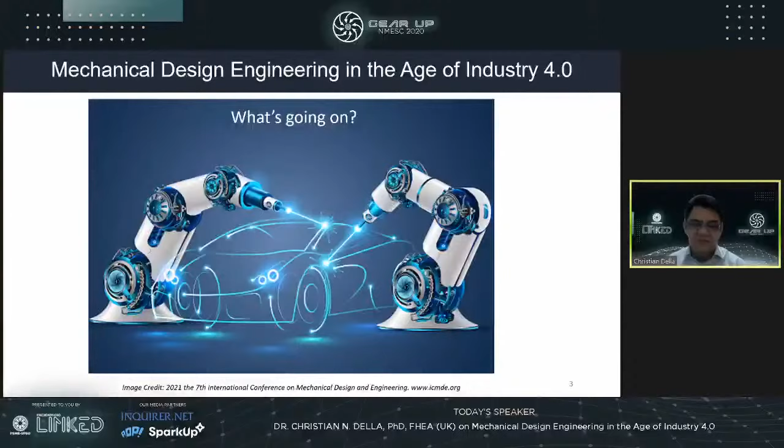So what is Industry 4.0? This talk is about the mechanical engineering or mechanical design engineering application in Industry 4.0. But before that, let's try to define Industry 4.0. Let's try to look at history first.

So the first industry, or Industry 1.0, is basically in the late 1800s. So we have this mechanical manufacturing powered by steam engine, very mechanical. Based on our background, this is what we may call mechanical engineering, because it is really mechanical - all those heavy, huge stuff that was studied during our undergraduate study.

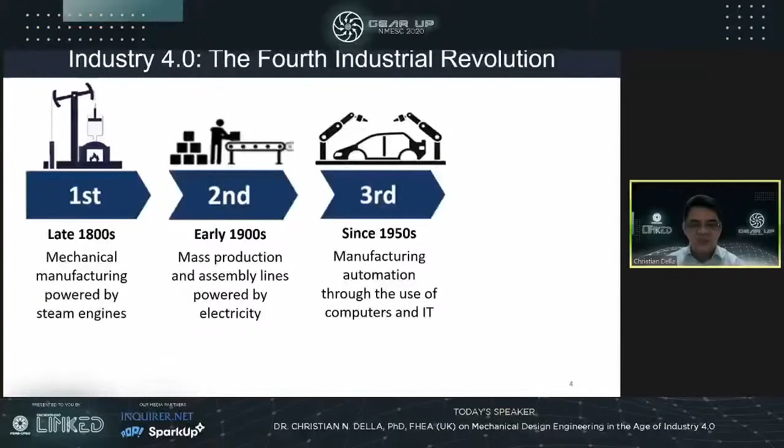The second is, of course, the improvement of the manufacturing through the concept of mass production and assembly lines that's powered by electricity. The third is the manufacturing automation through the use of computers and IT. And the fourth industrial revolution is about intelligent manufacturing, merging of real worlds and virtual worlds. From first to fourth industrial revolution, it's very obvious that we need to develop and improve the manufacturing systems and processes for continuous development.

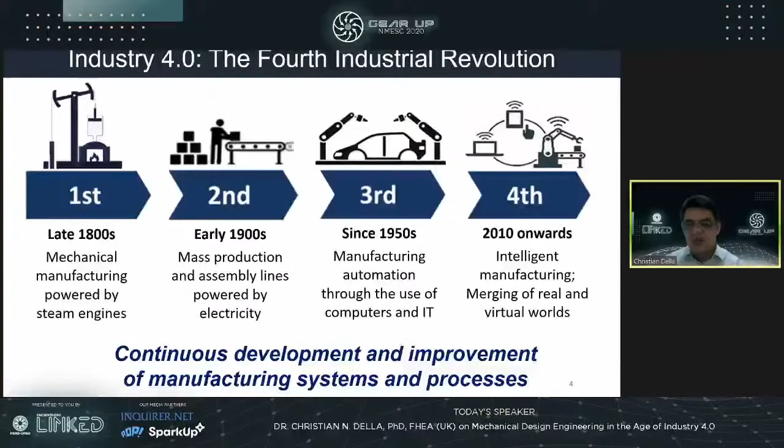Now, are we really at this fourth industrial revolution era? Most Industry 4.0 initiatives are still at the early stage process with a limited scope. We hear a lot of Industry 4.0, but at the moment, they are just initiatives, very limited scope. And pretty much these Industry 4.0 efforts are based on still improving the third or even the second industrial revolution goals, still achieving those third industrial revolution goals and trying to use the current technology to improve those technologies.

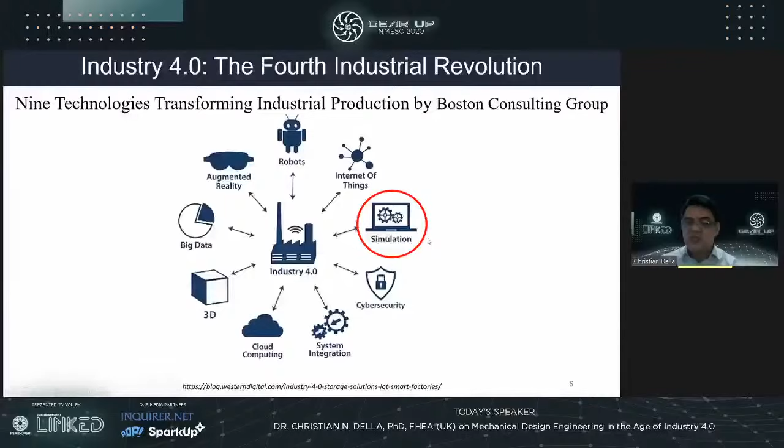The Boston Consulting Group identified 9 technologies transforming industrial production. These are the Internet of Things, robots, augmented reality, big data, 3D modeling, cloud computing, system integration, cybersecurity, and simulation, which will be the focus of my talk.

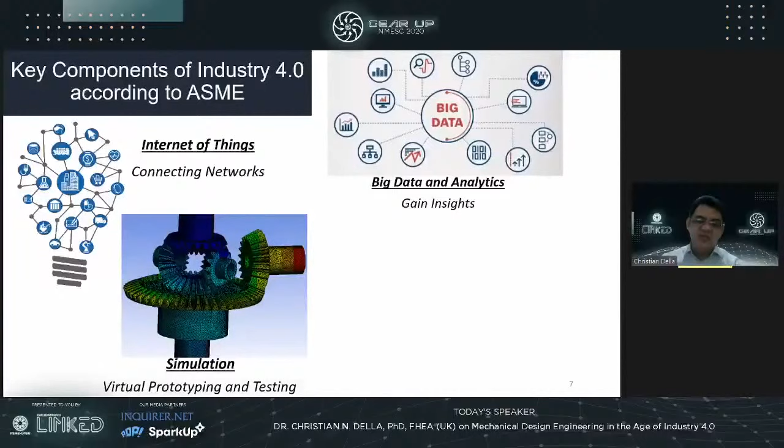What are the key components of Industry 4.0 according to the American Society of Mechanical Engineers? These are the Internet of Things, which connects networks, big data analytics, which provides insights from information out there, simulation, which is about virtual prototyping and testing, and additive manufacturing, which now provides the opportunity to fabricate or manufacture complicated geometries.

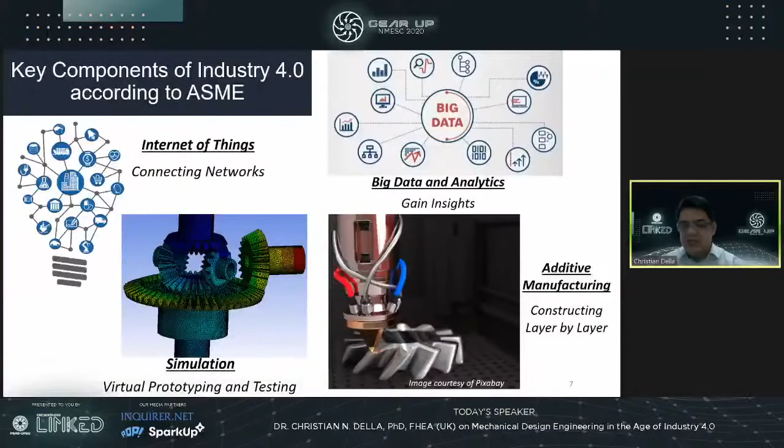When I speak of simulation, I speak of finite element analysis, which deals with solids, and computational fluid dynamics, which, by its name, discusses the movement of fluids, or simply fluid flows.

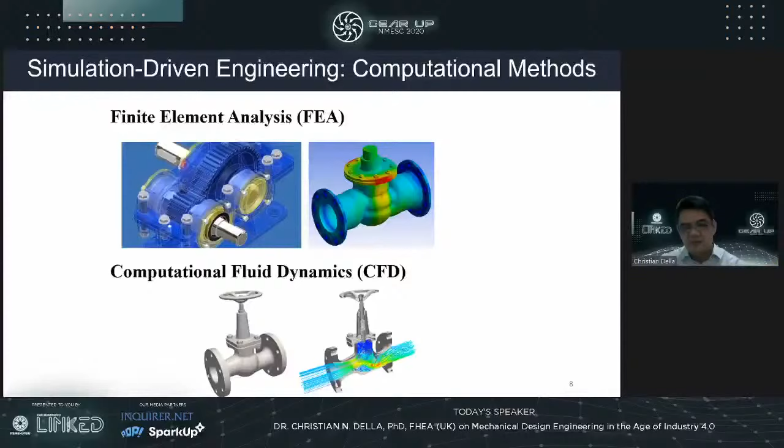So what is the future of mechanical engineering? There was an interview in 2008 at one of the conferences, and one of the students asked the professor, 'What is the future of mechanical engineering?' The answer was: the future of mechanical engineering is not mechanical engineering. So we need to ask ourselves what we define as mechanical engineering today, and what we should be defining it as for the future. Then we can begin to talk about the future of mechanical engineering.

So for this generation, your generation, are we looking at the rise of digital mechanical engineering? What does ASME, the American Society of Mechanical Engineers, describe, or how do they describe digital mechanical engineers, or simply digital engineers?

ASME says that the digital engineer is now expected to carry out simulations in the virtual environment first, before proceeding to the design, build, and test stages. In industry, this approach results in reduced product development cycles.

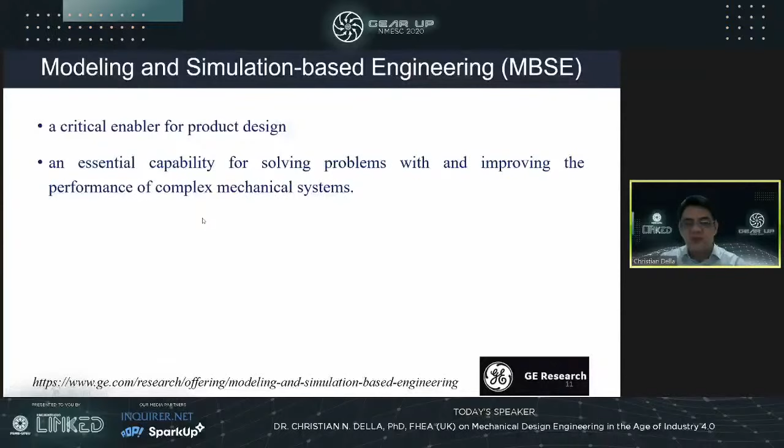To GE, modeling and simulation-based engineering is a critical enabler for product design. It is an essential capability for solving problems with, and improving the performance of, complex mechanical systems. Modeling and simulation-based engineering is used to optimize the design of parts and other equipment, and to understand environmental and situational effects on parts and products that can have significant impact on product performance, efficiency, and quality.

Modeling and simulation-based engineering is critical to reducing product design time, improving part and product performance, and improving the manufacturability and serviceability of assets.

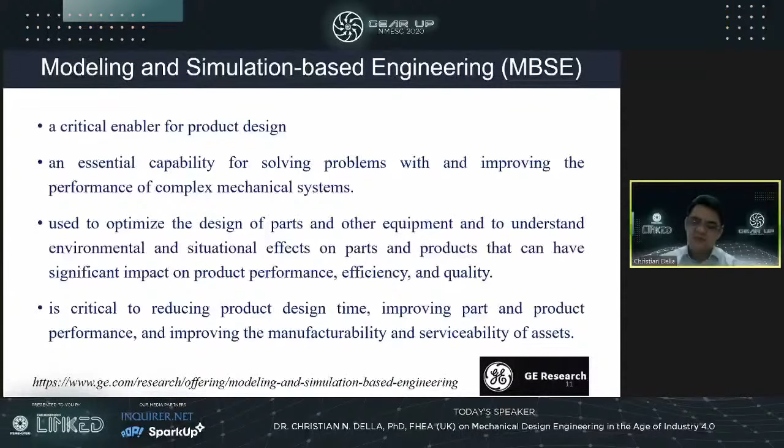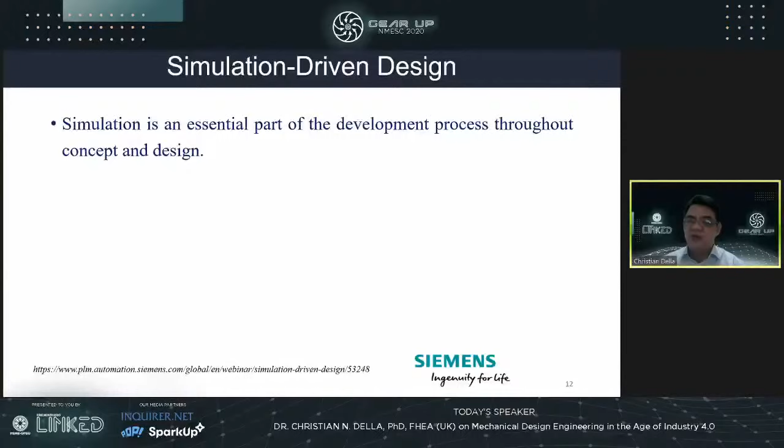What about Siemens? At Siemens, simulation-driven design is an essential part of the development process throughout concept and design. Simulation is leading manufacturers to discover and produce new designs, aided by new manufacturing processes such as additive manufacturing. Simulation helps designers create better, more robust designs earlier in the development process, while also speeding up the overall time it takes to release a design, i.e., faster time to market.

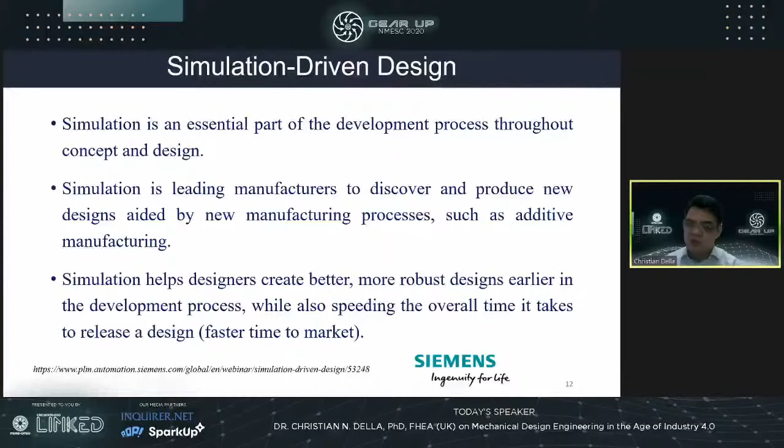But just like mechanical engineering, simulation-based engineering is also evolving. Let's have a look. In the 1960s, simulation was just based on, or being applied for, specific individual applications, such as mechanics.

In 1985, we see the development of simulation tools, which were now able to answer specific design and engineering questions, such as fluid mechanics. In the year 2000, simulation had advanced to be able to analyze the whole system, allowing a systemic approach to multi-level and multidisciplinary systems with an enhanced range of applications.

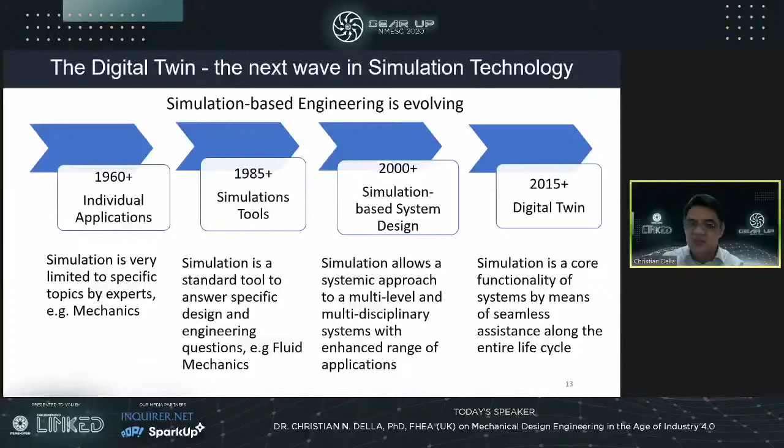So what about the digital twin? The digital twin is now a core functionality of systems, by means of seamless assistance along the entire life cycle. Okay, still not clear to me, so let's try to define what a digital twin is.

Let's start with the physical twin. We know that we have this physical system, and we made a digital twin, a simulation model, out of that physical twin. From the physical twin, we can get performance data, health data, maintenance data, and also the events or loadings that can affect the physical twin.

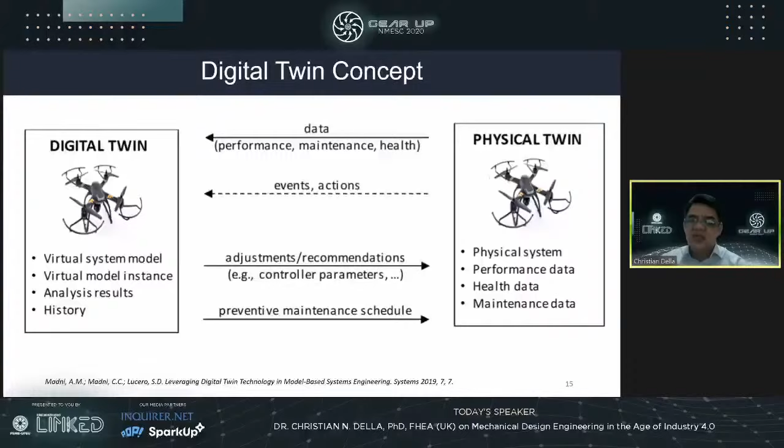This information can be transferred to that digital twin, that virtual system model, where we can analyze the effects of events and actions. We can trace the history, and then from there be able to come up with some adjustments or recommendations, as well as preventive maintenance measures to the physical twin. So this is a simple concept of the digital twin.

The digital twin is basically the seamless integration of Industry 4.0 technologies. As we can see, all these technologies are available. The current problem is trying to integrate them so that we will be able to increase production, as well as increase the life of our engineering structures.

There was a report in Europe that the digital twin market is expected to grow to over 15 billion by 2023. As mechanical engineers, we probably will be able to contribute in CAD and 3D modeling as well as simulation. Depending on your major later, you probably will be able to touch some of the other specialties as a data analyst or maybe robotics engineers and so on.

Moving forward, there are now many digital twin concepts that have been presented in the literature. We see them applied, or see the potential application, in manufacturing, automotive industries, offshore, aerospace, and of course wind energy.

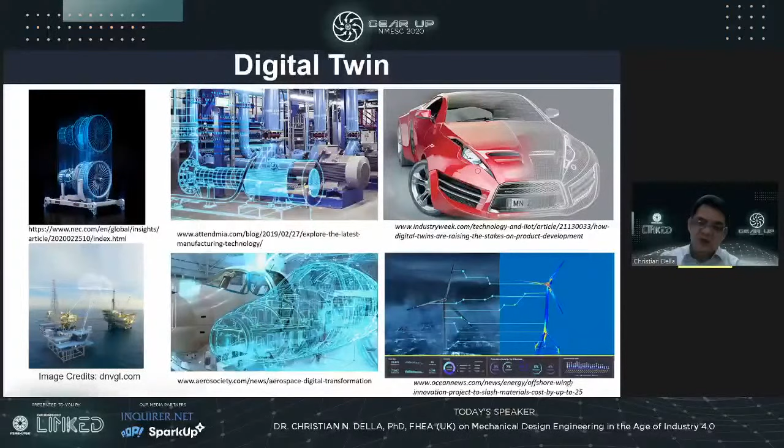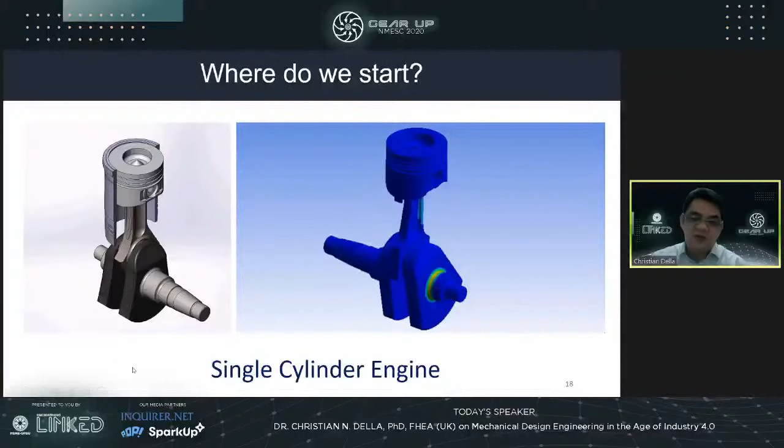One of them is, of course, learning the finite element analysis. In this case, this is just a simple static analysis where we study the stress distributions within our piston, connecting rod, and crankshaft, or basically just a single cylinder engine.

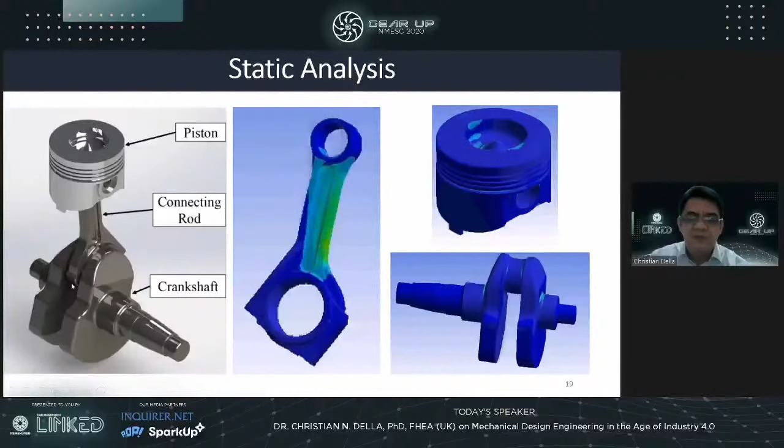Moving forward, we can also improve that model, make it transient, which is what digital twin wants to do. We can apply the loads while it's moving and observe the stresses and deformation within our structure. From there, we will be able to determine whether our structure will be safe or not. That's our job as mechanical engineers.

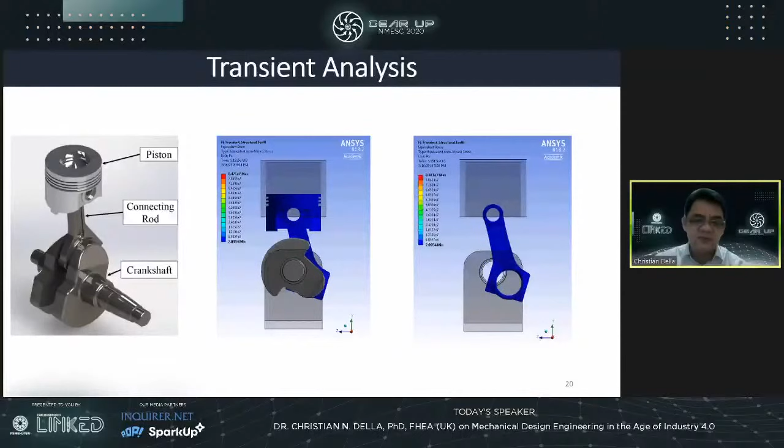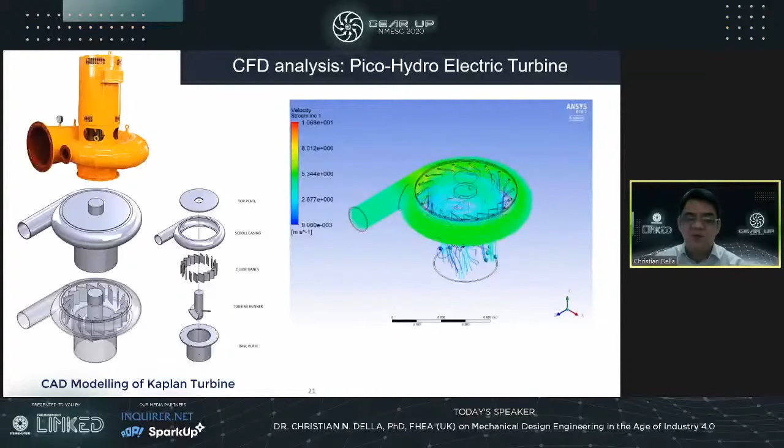So what about if I'm working on fluids? This is a classic example of a CFD analysis, or computational fluid dynamics analysis, on a pico hydroelectric turbine. We are able to simulate the flow of water through our hydroelectric turbine, and from there transfer the information to our finite element model, and be able to determine the stresses and deformations in our propeller. Thereby, we will be able to determine whether our turbine will be safe or not based on the loads that we have.

Now, if we see that there is a very high stress acting on our structure, then we probably can inform the operator to lessen the load that's being applied to our turbine. And that's how this one works. It's just that for digital twin, instead of a human trying to inform the controller, it's now AI trying to inform another AI to control the operation of this turbine.

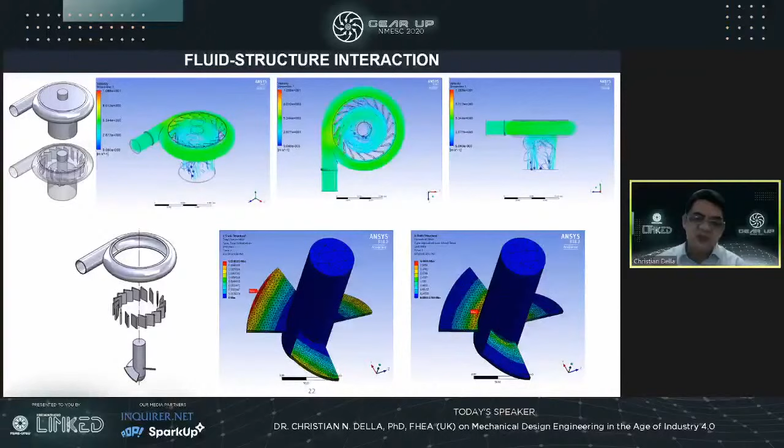So if I want to learn how to develop simulation models and probably become a simulation engineer, what do I need to know? What are the knowledge and skills that I need to develop? We are already mechanical engineers, so we probably would already have a strong background in engineering sciences, looking at mathematics, physics, engineering mechanics, heat transfer, thermodynamics, and so on and so forth.

We should have a strong understanding of the theories of the computational methods. It's not just application of tools. We see nowadays that there are many softwares being used by people who don't really know the physics, mathematics, or science behind these tools. And that's really dangerous, because they might be designing something that's not safe or can cause problems in the future. So it's really important to have at least a good understanding of the computational methods that we have at the moment, what are their strengths and what are their limitations.

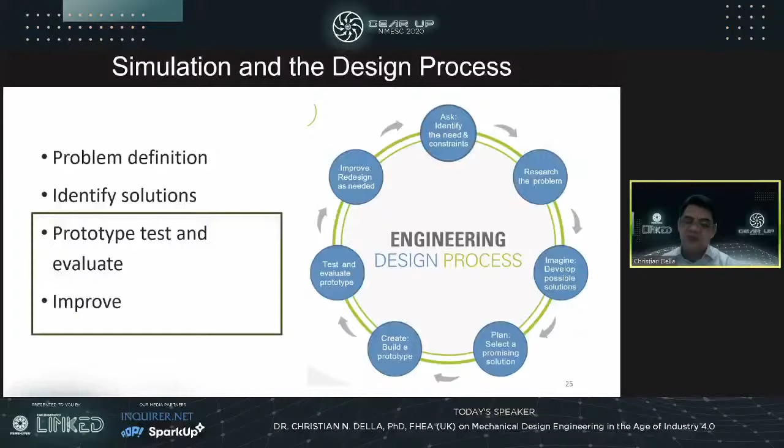The prototyping, testing, evaluating and improving can be very expensive and time consuming. But through simulation, we will be able to reduce the cost as well as the time to conduct various prototypes or develop prototypes, as well as virtual testing, while also improving the performance of the design.

Let's look at this new concept, which is design thinking. This design thinking is a method of designing a product that tries to understand the needs of the users. This design thinking concept encourages us to work with the users to develop our design. It starts with empathize, understanding the needs of the users, defining the problem, coming up with ideas, prototyping, and testing.

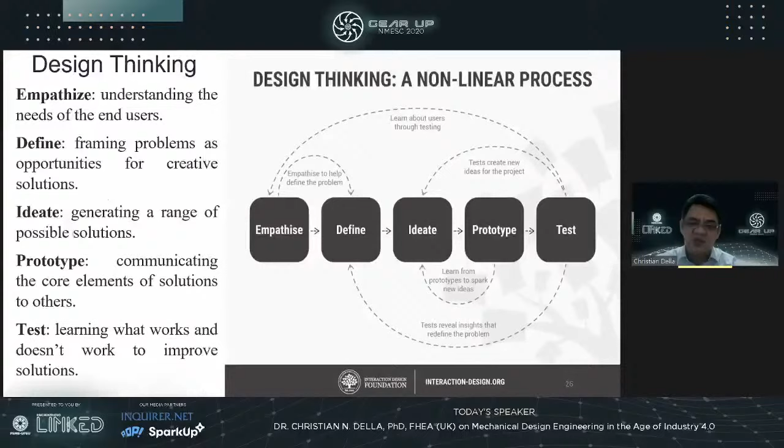Of course, this process is not linear. It's basically non-linear. So where does simulation come into the process of design thinking? Because prototyping and testing can be time consuming and very expensive, simulation can really play a major role.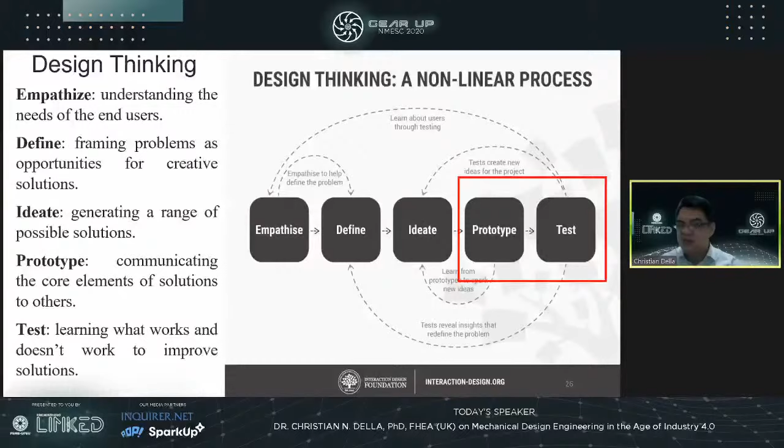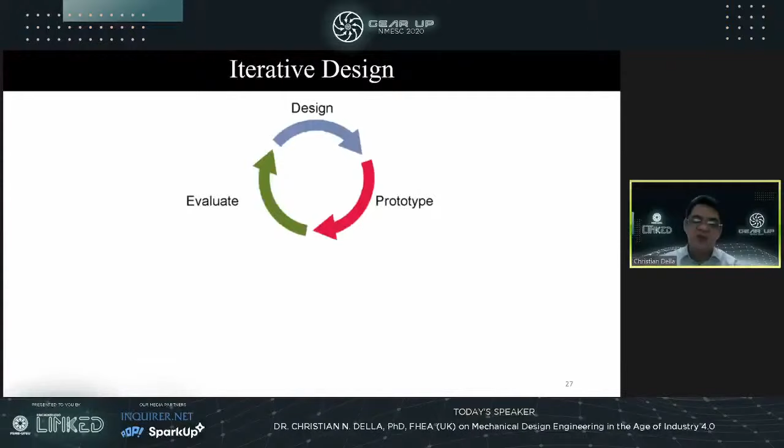There is also that concept of iterative design, wherein you design, prototype, evaluate, and if you need improvement, then redesign again, and so on. So you do a lot of iteration. Getting it right the first time is hard, and the first design that you have probably won't be the design that you're going to release to the users.

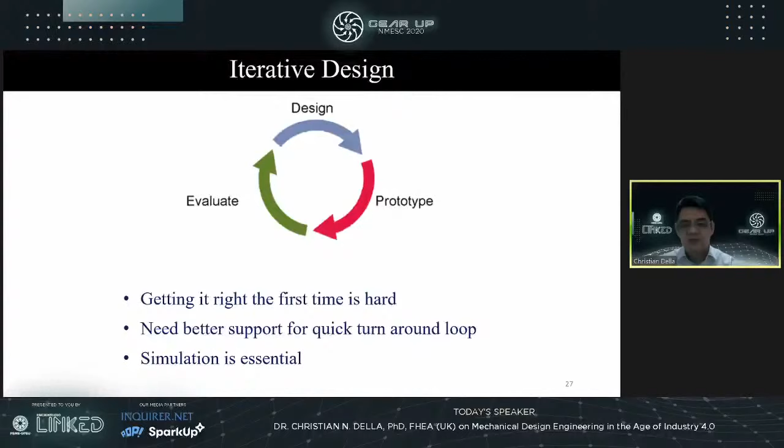So here we will need better support for a quick turnaround loop. Simulation becomes essential. So what about innovation?

Just to quote Thomas Edison: if I find 10,000 ways something won't work, I haven't failed. I am not discouraged because every wrong attempt discarded is another step forward. Also, he mentioned that genius is 1% inspiration and 99% perspiration.

In an article in Forbes titled 'Why the Future of Innovation is Simulation,' it mentions that innovation is now 1% inspiration and 99% simulation. So innovation is about repeating things until you think you have perfected it. And with that, simulation really plays a very important role, making our repetition process faster and of course, cheaper.

Why simulation? If it's not applicable to design, we can always use simulation for safety analysis, fire protection, heating, ventilation, air conditioning, power plant operation, and so on. Because as you can see from Murphy's Law, anything that can go wrong will go wrong.

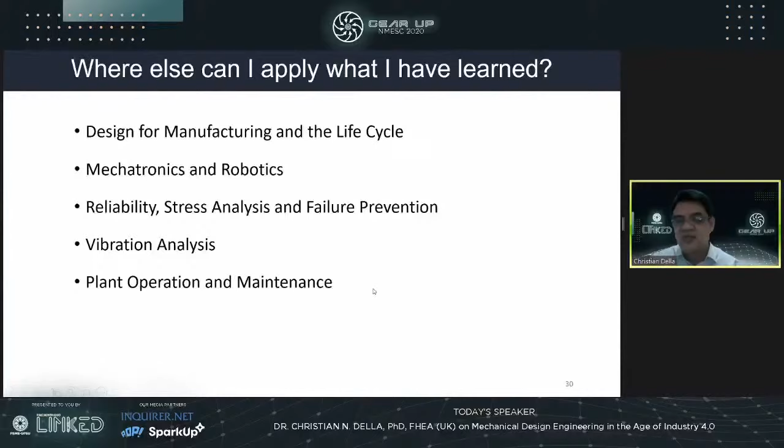So are we saying that we'll just focus on our technical skills? What do you think?

In this case, we should also try to improve our soft skills. In order to be job ready, or to survive the current industry, we need to be adaptable. We need to be willing to learn. Yes, you have already completed your bachelor's degree, but should you be learning more? Of course, learning never ends.

So of course, it's not just IQ, we also have to look at EQ. We have to develop our interpersonal and communication skills, improve our problem-solving skills, and of course, we need to be creative.

Engineering is not just about using the formulas, memorizing the formulas, passing the board exams. When this is over, you're just going to become an Excel spreadsheet to them. You don't want to be that Excel spreadsheet, using equations, putting in numbers, coming up with solutions to problems. You probably would like to be the person who creates that Excel sheet.

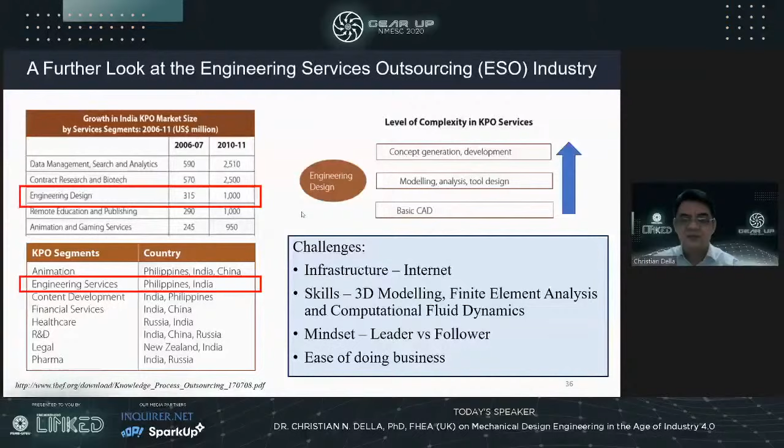This is the report commissioned by the Department of Trade and Industry. It mentioned that the Philippines is still at the entry stage of the ESO complexity spectrum. We're basically at CAD 2D drafting, some simulation but not too much, and probably at the conceptual design analysis stage. When it comes to product life cycle management and quality improvement, we're still not there.

These are the 5 areas identified where the Philippines can further improve: quality hard skills, meaning quality of maths and science education, soft skills, English proficiency, and the degree of customer orientation. I believe the degree of customer orientation in the Philippines is already high.

We also need to increase the talent pool and future readiness, meaning we should increase the number of scientists and engineers or research engineers. We need quality research institutions, and we should have availability of specialized training courses to support the engineering services outsourcing industry in the Philippines.

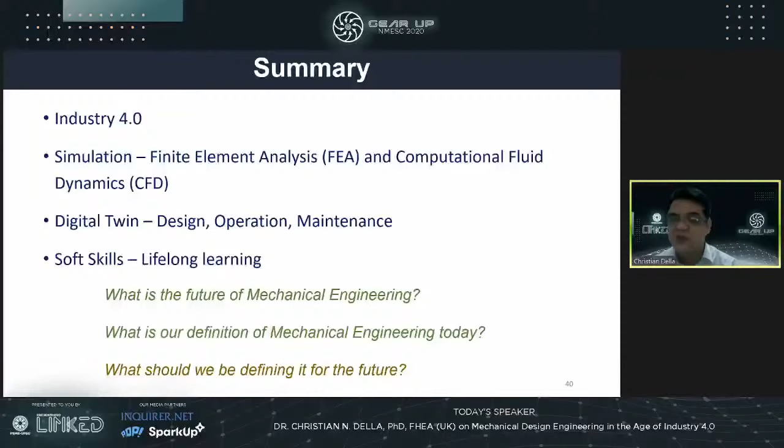However, for the future of mechanical engineering, for the succeeding engineers, I hope that you will be able to define that for the future engineers too. So this is my second to last slide.

I'd like to mention that education is still the most powerful weapon which you can use to change the world. This was mentioned by a very famous man who basically changed the world. Also, quality education grants us the ability to fight the war on ignorance and poverty. To me, education really has improved my life, changed my life, and I hope that with this presentation, I can also help you change your mindset.

On teamwork and success, there is this African proverb: if you want to go fast, go alone. If you want to go far, go together. Finally, to be able to succeed and to go to where your mission is, you need to surround yourself with those on the same mission as you.